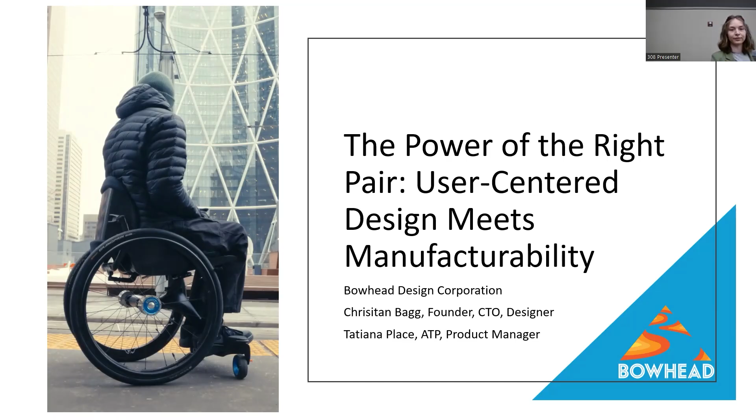I'm Tatiana. I'm the product manager of the Bowhead Aero wheelchair, but I actually started with Bowhead about 6.5 years ago as a co-op student.

It was a pretty funny story, but I met Christian in a hotel in Edmonton. He was there for a conference, and after 15 minutes I found out I would be working in his basement on these crazy adaptive bikes. That was kind of all I knew. In my biomedical engineering degree, you have to do an internship that applies mechanical engineering techniques into a medical field, so I was kind of just satisfying that requirement. Little did I know that I had found my forever home and dream career.

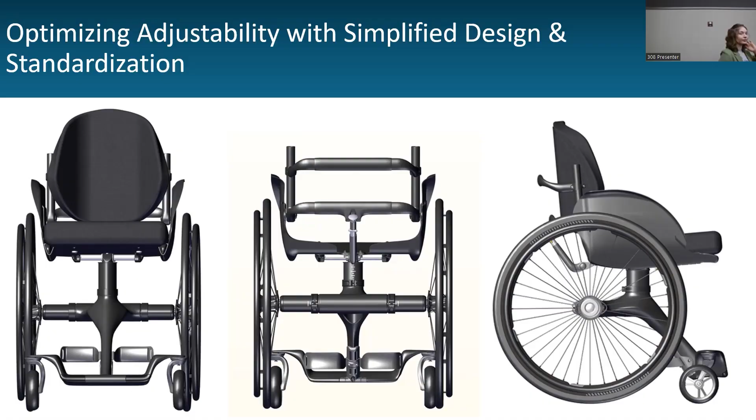That actually leads back to the bike and really parallels the automotive industry in manufacturing. Our fourth bike, the four-wheeler, is, as we mentioned, the back of our third bike and the front of our first bike, with some things in between. But what it did was bring forethought about how far apart the frame is and which connections we're going to use — very mechanical things that aren't customer or client facing — and that allowed us to build off that platform.

There's a good chance the new car you're driving around has the same chassis as a car that's five years old. Manufacturers do things so you have a platform, a foundation, that you can build off of. That's what we've tried to employ here.

Though we have amazing CAD partners, with the renderings on the right, our design does start — and design for manufacture doesn't have to start at a very high level, anybody can do it, and that's what's being displayed there. The whole chair started with an acknowledgement that people have different wheel sizes, both on the front and the back.

There's endless decisions to talk about as to how this chair came to be, but this is a really good example of where those three positions came from and why the egg shape is the shape it is. The little pies represent the radius of different size wheels.

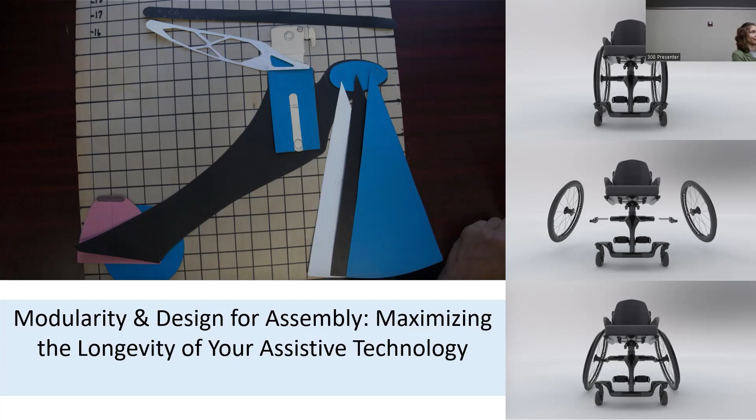It also goes all the way to ordering parts. If you need a certain number of parts every month, having hundreds versus tens is obviously a lot harder to manage and harder to keep control of shipping time, and also just keeping costs down. And then, as Christian was mentioning, all the tolerancing and engineering that goes into different pieces, using different techniques.

Let's go back to our rear clamps here that hold onto the axle tubes. These ones are our most simplistic, basic clamp. There's nothing added to it, but by simply replacing this piece, you can now add functionality for a rear power assist device or anti-tippers. And then you aren't stuck with that. You can change two small clamps over time - maybe that's $50 - and you can have this chair with all the safety requirements you might need when you're first coming out of rehab. But then as you learn and gain your skills, you can take that off and shed weight. It enables you to change, modify, and grow your product as you want.

Another key feature is the removable seat. This really splits the chair so that we could worry about all of the performance characteristics and geometry of the chassis and setting up our casters, like Christian mentioned, without the need to adjust angle. And then all of that is accommodated in all of the other parts we've designed.

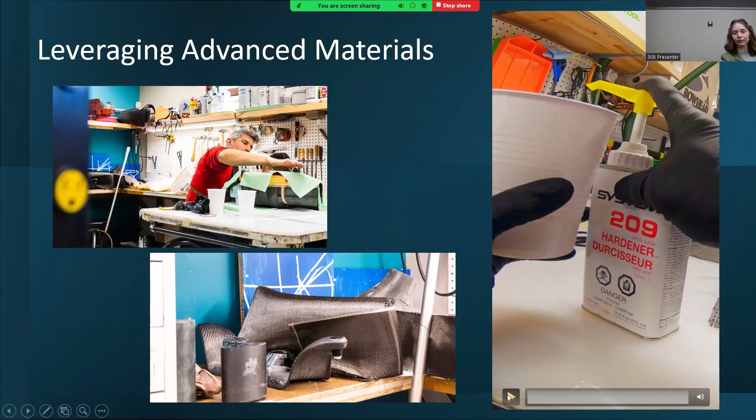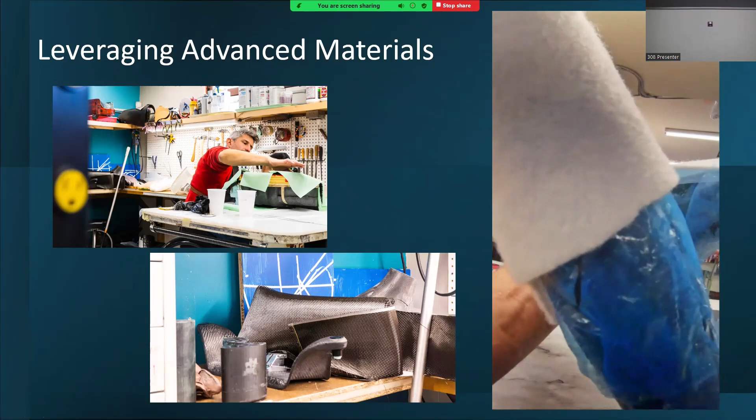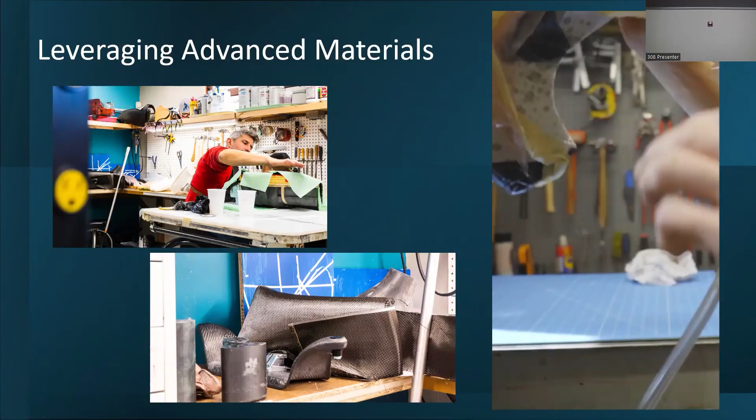A little bit about composites - I don't know how many of you were in the composites talk the other day. It seems like a bit of a buzz, a newer thing in the adaptive space. A lot of the questions about composites, I imagine, would have been asked 20 years ago at a bike show, a golf club show, a tennis racket show, or anywhere else that's been using composites for that long. So just to give a really rough rundown, the video is showing you.

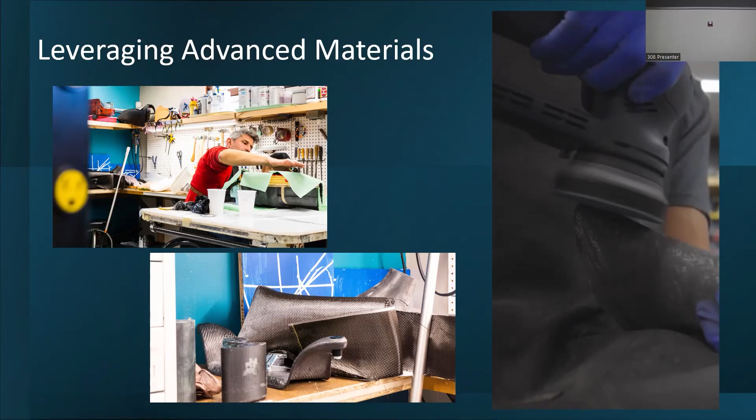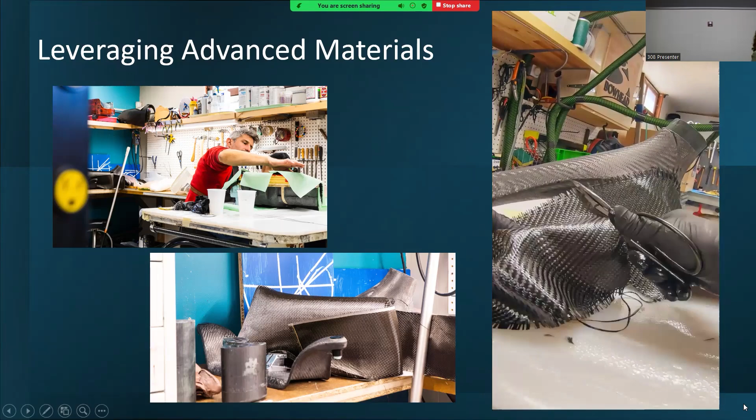So carbon fiber - if you've worked with paper mache, you understand carbon fiber. It's cloth and glue, essentially. At the basic home level, it's exactly that: a woven sheet of cloth, whether it's fiberglass, Kevlar, or carbon fiber, like the clothes on your back - a woven fabric. Then you mix glue into it, epoxy, all sorts of different types of epoxy, and squeegee it in. I did a lot of the work. So you wet it out, get it saturated with glue, and use layers of it around a mold or inside a mold, some way to hold the shape of that cloth. Then you end up with your shape.

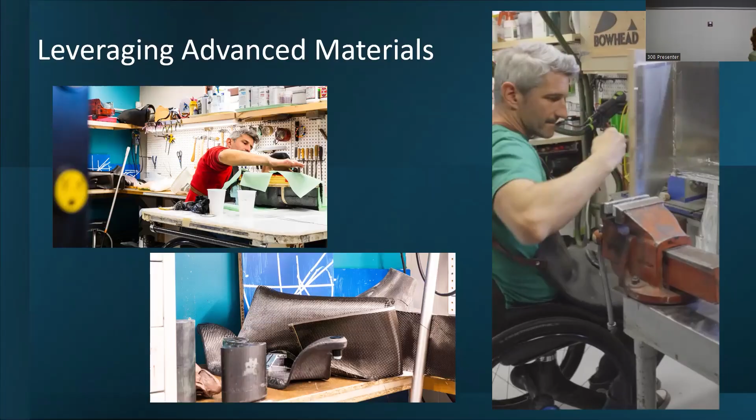If you test it and that shape is too weak, it's a really interesting and great material compared to metal, because that same part you can put more cloth onto and make it stronger in the area that broke.

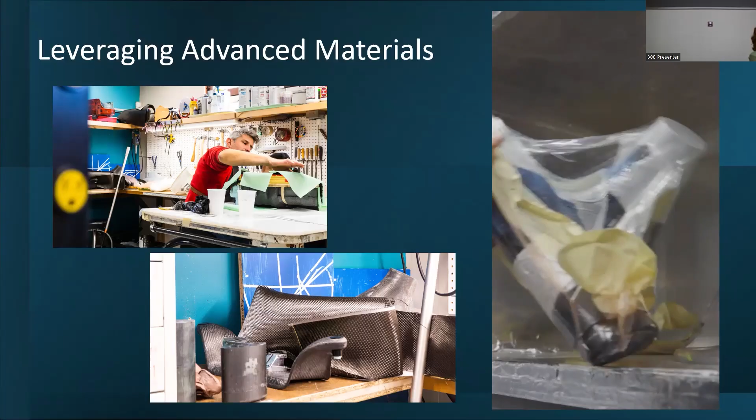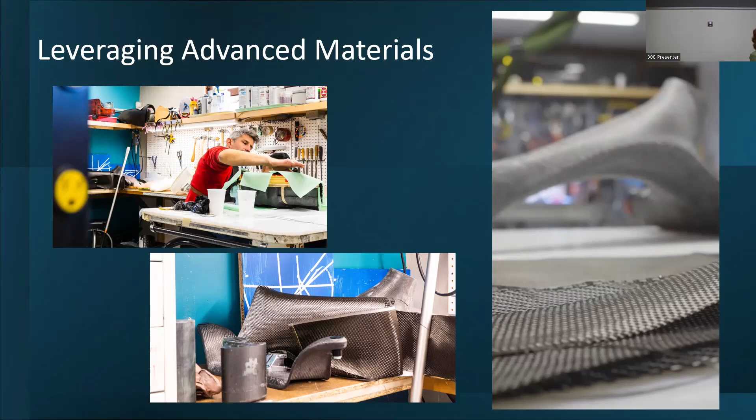That's really a strength of carbon fiber or composites - you have really good control over your product. So going from a wet layup, where you've got wet epoxy, you end up with pre-preg, which is pre-impregnated cloth with epoxy. A machine that's much better at determining the ratio squeezes that epoxy in, and it sits in the cloth in a refrigerator, not curing until you need it. Then you unroll the cloth, it's already there, and you're able to cut the pieces better because they're not a soggy, wet piece of cloth. You can determine where they go in your mold more easily. That's why composites make for a really good manufacturing material.

That's why bicycles are made out of it, and golf clubs and hockey sticks and tennis rackets and all this. It's not just because it's high performing, it's because it's very manufacturable and very easy to control and learn, and move strength around.

For example, on our chair, the wing up front, the sideways bit that holds your feet, is basically like a pretty big long leaf spring. If you loaded it up, it would flex. So you need a lot of cloth through this area, but maybe back here where it's really big and voluminous, you don't need as much cloth. So you can move it around.

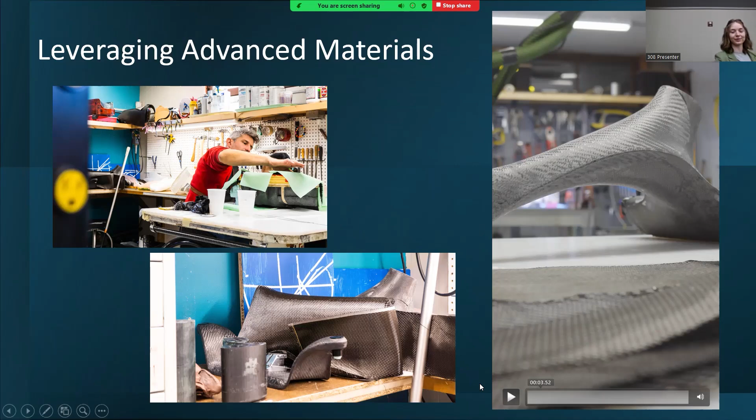The beautiful chair that I made in my basement, I don't even use now. It just sits there - it's essentially hundreds of hours of garbage. That's where manufacturing can take you. Even if you care deeply about something, you recognize that the thing that you can engineer and come off of a mold is ultimately better than the handcrafted thing that's made to measure for myself, by myself.

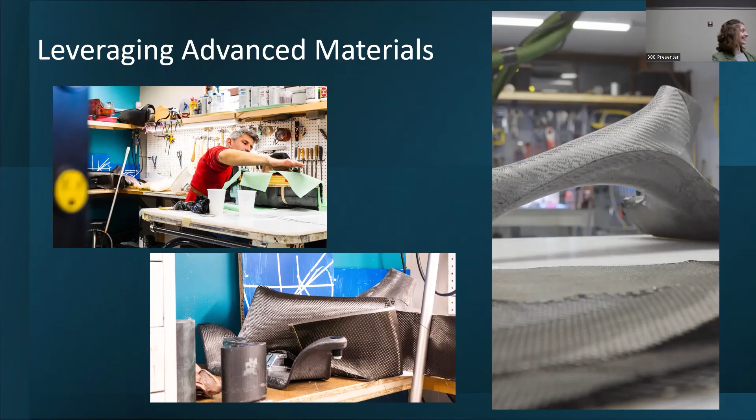So there's a little bit about carbon from our end, for anyone that was in that talk that wanted an easier explanation. And there you go.